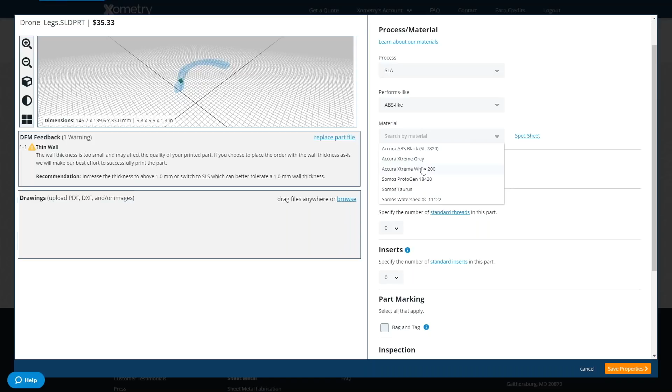In this case, I'm going to highlight SLA for obvious reasons, because that's what we're talking about today. We have a performs-like dropdown that can help you out if you're looking for something to simulate a material, because everything in SLA is an engineered simulant, so something that acts like polycarbonate or polypropylene or ABS. Let's go with ABS here. I could drop that down, and I could select materials that act like ABS. So let's do Xtreme White. And let's do this in high resolution. You'll see a few things happen.

Your price updates, as well as DFM feedback, will show on the site. So in this case, I have a very thin area right here that I may want to address. Let me go ahead, save properties, and show the next cool feature here, which is our replace file.

So this is brand new. This has been requested for probably like a year and a half now, so we're really excited to add this on board. Now when you get this DFM feedback, you can upload a revision right on the site, so you don't need to go into our parts library anymore to upload your replacement file.

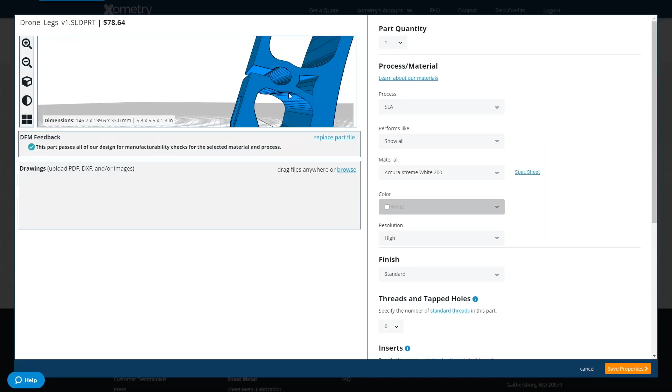And once this uploads, basically change your rev, you can do that directly on the site. This version I had here, I essentially took that DFM feedback, did a design modification on my part, and boom, everything is green and golden here. So my feature down at the bottom, I added more beef, cleaned it up, and now I should be fairly confident with my print that everything's going to turn out great with this feature.

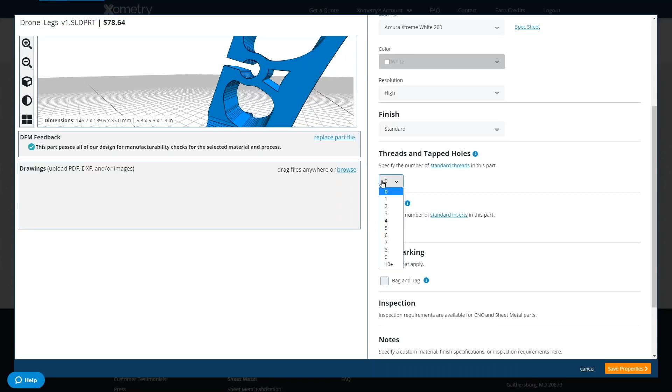With SLA in particular, we have a few finishing options. We have standard, matte, and custom available. SLA is kind of unique where we have a material called polygel, which is also a photopolymer process, but in this case I can actually do some stuff like threads, tapped holes, and inserts with this material. It's a little bit more robust. And even things like bag and tag, you can click through there.

As with all our orders, we are able to add certifications, so things like COCs, material certs. Even if you are working with something export controlled, you can click ITAR here, and that will change. That's extremely important to know up front as we're working this job through.

And once you're ready, you could upload multiple parts, configure them how you want. You could just go ahead, place order, and walk through your process.

So I could go back to the quote a little bit later if we have any questions in the Q&A session, but I really wanted to show that replace part feature because it's been so powerful once we added it. It's been widely used, and I wanted to show all these options we have available for getting quotes in different materials and different subsets, for example, of 3D printing.

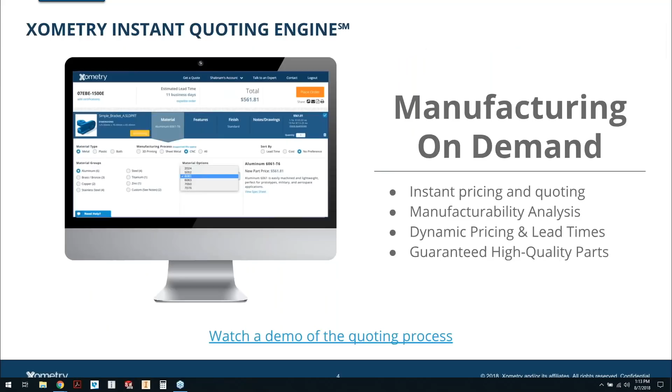So let's go back here. Let's get into the beef of this. Tommy, what is stereolithography 3D printing?

Yes, thanks Greg. Hey, this is Tommy. Hey, it's me, it's me.

Just a little bit of background. I think Shilpa had touched on it, where I've been in the 3D printing industry since, I guess, about 2004, and the first job I had out of college was actually working in an SLA shop in the finishing lab. So I felt all the pain of every part of the process, and this process is definitely very near and dear to me.

So as far as what is stereolithography, it's a technology where you're using an epoxy-based photopolymer. Basically all of the SLA materials are epoxy-based, and by photopolymer, that means the epoxy is activated or cured by the introduction of UV light.

So on the image on the right, you can see this laser scanning, and that's basically what's happening. If you're building a model of a person, our software is going to slice that person up into 1,000 layers vertically. With SLA, you have the option of 2,000ths or 4,000ths thick layers in most cases.

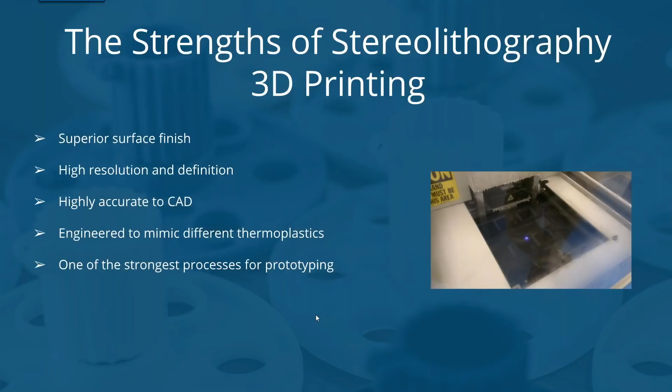We'll go into deeper detail on surface finish a bit later, but as far as prototyping for injection molding, this is hands down the technology I've used the most. A couple final comments on the SLA process in general: as mentioned before, all materials are epoxy based, formulated to mimic common thermoplastics in terms of relative stiffness, but not necessarily overall durability. All in all, I'd say this is one of the strongest processes for prototyping in general.

Just a quick recap on stereolithography: the strengths are it has smooth surface finish, high accuracy and detail, it does a good job of representing common thermoplastics, and overall it's an excellent balance of form, fit, and function.

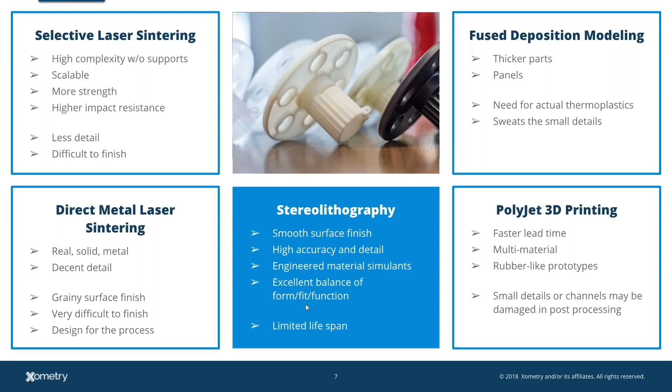I wanted to touch on direct metal laser sintering. It's very different as far as process and material, but in some ways it's similar to stereolithography, because you're building parts off a build base. In this case, you're building with a metal powder bed.

You're doing a similar thing, building small protrusions that support the part with a metal support structure. The difference is you're not using an X-Acto knife usually — when you're removing supports, you're using a bandsaw, pliers, and CNC machinery. So the finishing side of DMLS is very different, even though conceptually how the parts grow is similar — it has everything to do with the materials you're building with.

I may use SLS or SLA to do a test run of something I plan to build in direct metal laser sintering, because the cost is much less to prototype before committing to something like DMLS. Especially as I get to larger parts, like over the size of my fist, I may want to spend more time on the prototype to ensure it works before moving into a full metal part.

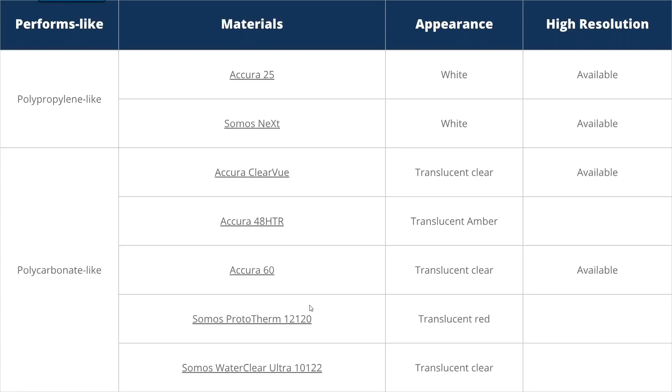I wanted to go over our material offerings. On our site, if you go to our FAQ, there's a link to learn more about our materials. There you can scroll down, read a small description of each material, and download the data sheet. The data sheet will also be available on our website — when you select that material on the quote dropdown, you'll be able to see that data sheet.

We've partnered with manufacturing partners all across the United States running real, professional stereolithography. One of the coolest things we've been able to do is offer both Accura and Somos material selection. Accura and Somos are actually competing brands, but Xometry isn't a single unit — we're kind of agnostic. All we want to do is focus on the applications that make your project a success. So you can click, drag, upload, and quote in these 15 materials, some of which have high resolution.

To help out a little bit, since people don't know the difference between Accura 25 and Accura 60, or Accura 48, like what do those numbers mean? I don't really know, but I can tell you that they're made to simulate things like polypropylene or polycarbonate.

We've actually created these major level categories for saying, hey, I have a polypropylene-like, or an ABS-like part, or a polycarbonate-like part, or even a rigid ceramic. This will help you down select from these 15 parts. As always, you could go even further with our data sheets, or even chat with us or talk with Tommy to help select through.

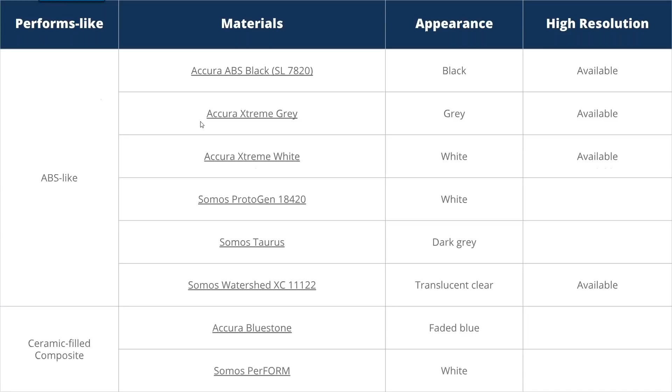But you'll see some themes going through here. From a general purpose standpoint, a lot of times our customers look at Somos Next or these Accura Xtreme materials as their catch-all material. I don't know quite what to choose, but I know these ones will work for my goal, because it has a very good balance of flex. So things like snap tabs, things like lip seals tend to work pretty well with this material, as well as a little bit of durability, because that flex gives it what I would consider impact resistance.

Another way to be durable is to be sturdy and strong. So things like Accura 60 is more kind of polycarbonate-like, and it's stiffer, but that means when it breaks, it doesn't bend, it snaps on you.

Tommy, you have more experience on this, but things like Bluestone and PerFORM are ceramic filled, and you don't even expect it to bend, right? Right, yeah, those are not going to bend at all, and yeah, they're ceramic filled materials. So I hesitate to even refer to them as plastics.

But yeah, they're very stiff, very rigid. They may chip a little bit, but overall, when you're thinking about these material selections, the polypropylene-like is going to be the most flexible. ABS-like is going to be the next up in terms of slightly more rigid. I think there's a lot of good options for general purpose materials in here.

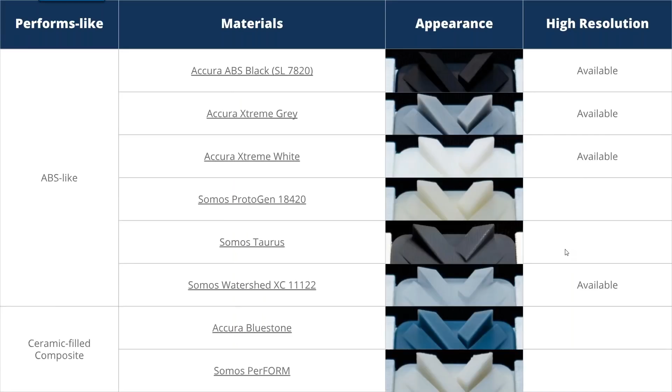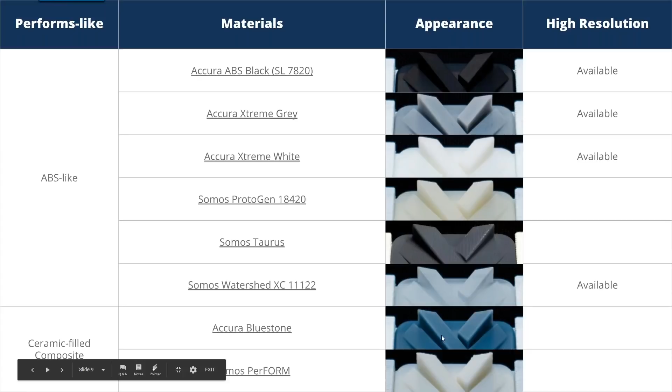That's actually a good point, Greg. There are a few of these materials in the polycarbonate and the ceramic filled options that can receive a thermal post cure to increase their temperature resistance, and that would be the Accura 48HTR, the Prototherm 12120, and then I believe it's going to be just the Bluestone and the PerFORM.

Temperature resistance wise, I believe after post thermal heat treat, it goes from about a heat deflection of 57 Celsius to somewhere around 110 Celsius. So again, compared to true thermoplastics, it's still actually fairly low in the game, but it's something that can bring a higher performance level.

At this point, that'll be more of a custom quote, but we hope to automate that within the quoting process.

I also wanted to spend some brief amount of time on what does SLA lead to. So we've compared it against other 3D printing processes and talked about how it goes hand in hand, and where to choose SLA. Usually, again, surface finish resolution is one of the biggest things that is talked about when you talk SLA.

But SLA also has played a very, very important role with this top row here. So when you do something like bridge tooling, and building urethane casts, one of the first things I do is I create something called a master pattern.

And that is something that is very accurate to CAD. I'm usually going to do some sort of hand finishing to it, so for example dry and wet sanding to get it to a smoother surface finish. I may even do things like clear coating to bring up more of a gloss look to it.

But with urethane casting, you're actually making a silicone tool around that master pattern, so whatever that pattern has on it is going to be what shows up. In fact, I've seen examples of someone accidentally putting a thumbprint on that clear coat, and all of a sudden every single part has a thumbprint in it.

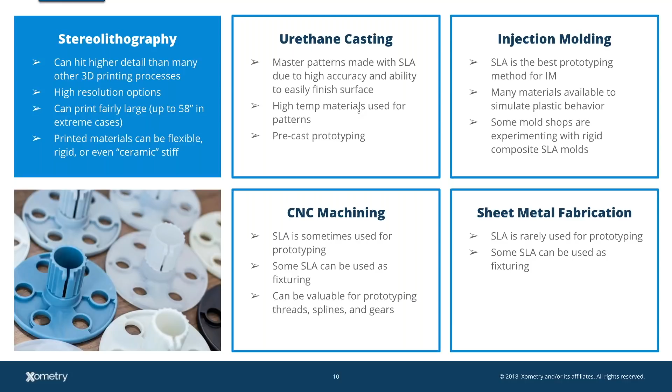And just by the nature that SLA acts like a plastic, it doesn't have the same rigidity for sheet metal, so I could probably count on one hand the times I've seen SLA used for sheet metal prototypes. I've seen other processes in our 3D world used, but with our site and our lead times, often it's almost as quick, maybe 2 business days further, to just get the real thing made. So I'd recommend when you're looking at different options for prototyping sheet metal, look at sheet metal as an option as well.

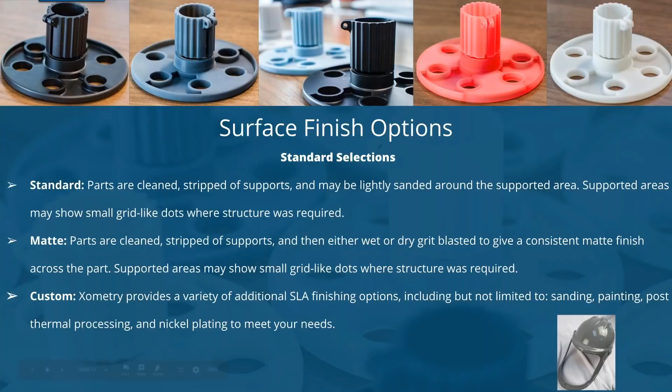And then finally we have our custom offering. There's just a ton of things that can be done to SLA parts, whether it's smoothing out with additional sanding on the non-supported or cosmetic surfaces, painting, thermal post cure, and then there's also options for nickel plating, which is pretty common, especially with the rigid composites.

So to wrap it all up, from a transparency standpoint, you can see some images down here of parts that were built in SLA and then received some significant post-finishing that basically took them to real transparency. As built, the transparent materials will still kind of have that marbled look, because the layer lines make it so you can see colors through the parts, but you can't necessarily read text.

But as soon as you say we need additional smoothing on these surfaces, then dollar signs follow very quickly, just because it's a very manual post-processing step where there's somebody in a finishing lab starting out with probably a 220 or 320 grit sandpaper, sanding up to about a 600 grit, removing all the scratches in between, and then adding some level of clear coat.

There's also a big difference in labor between wanting something that looks kind of like an icicle, where it's glossy but you still don't see a clear picture through it, maybe some distortion to it, versus something like this faceplate here, where it's been basically optically smoothed out. That's probably 4 or 5 more levels of sanding, wet sanding through, and then several coats to get this type of finish. So just understand that is labor.

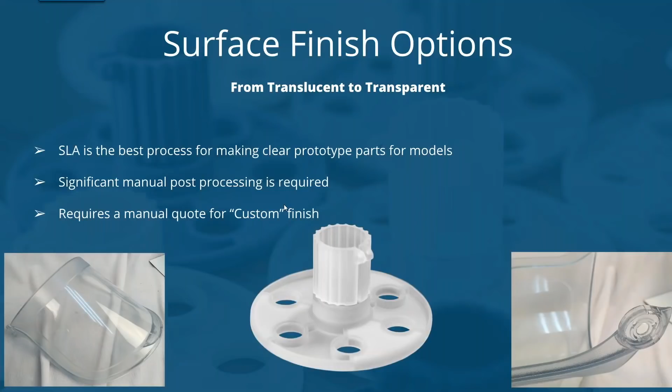It wouldn't surprise me if that was, say, a $200 or $300 part with a $400 finishing job on it. A lot of times when customers hear that, they don't want to pay that much. So to improve transparency on your own, you can get the part as a natural finish, and if you have some 400 or 600 grit sandpaper and a can of rattle can acrylic or lacquer from a hardware store, you can make significant improvements to the parts just by adding clear coat, without all the custom finishing.

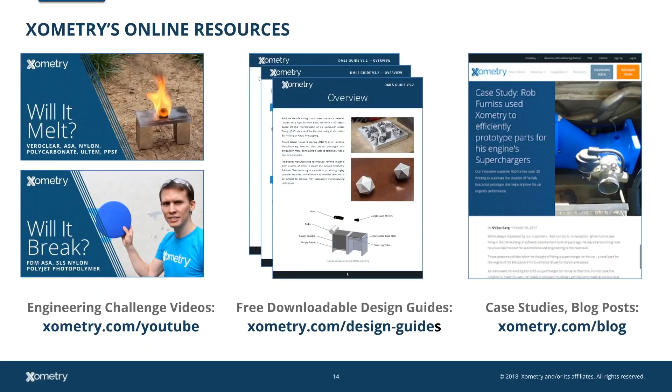And of course we have our YouTube series. We have instructional videos, but also this kind of edutainment series I've been doing covering things like heat resistance and impact resistance. I'm really excited to have 15 SLA materials now on this list, because that expands what we can do with our next set of videos. But remember, we do a lot of everything, and there's not one single process that's your answer. There are many different factors that go into what you're looking for, whether it's time, scope, cost, or something else. We're here to help guide your project, because all we want is a successful project—that's what makes you a customer who comes back for life.

We're always looking to add to our applications and to the different material selections we have, so please keep your feedback coming.

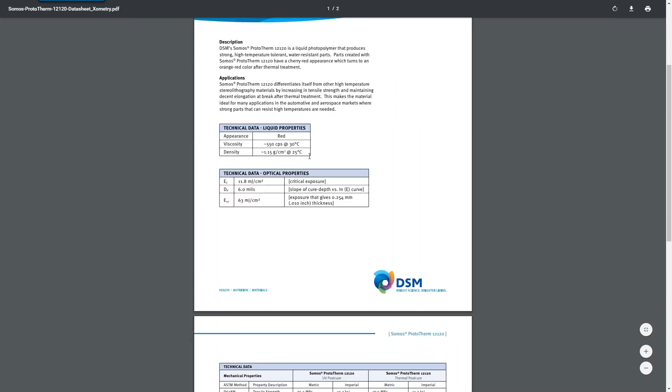I did see something about max temp, so I'll click on Somos Prototherm, which can have a post-thermal cure. There's a pre-cure, basically the UV cure as Tommy was describing, around 57 Celsius. But if you go through a thermal post-cure, you can get into the 110 to 126 Celsius range of heat deflection, which is basically the temperature where your part stops performing like it should.

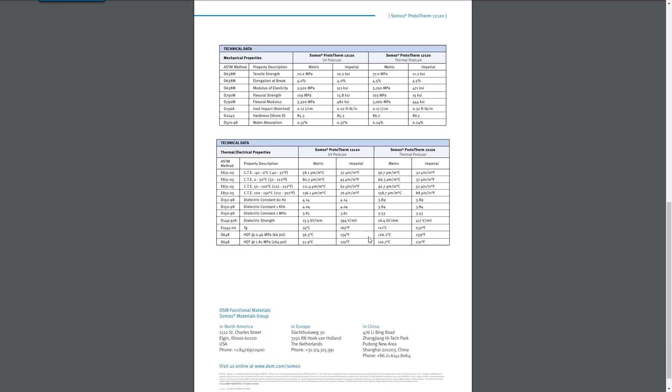So you can find that information—we have a spec sheet for every single material that we offer.

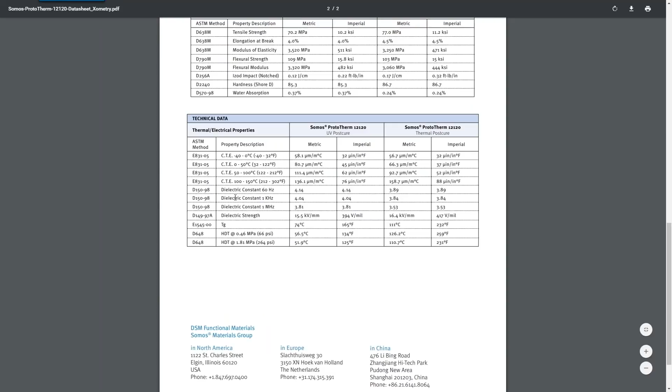I'd say try it out, even compare some costs. One of the beautiful things about our website is you can upload your 3D CAD file, select SLA, and see the lead time and price right away, and toggle between different materials and processes just as easily. I think one of the beautiful things about our site is that we offer all these manufacturing technologies in one place, one platform, to help you make a better, more informed choice for your next project. And honestly, SLA is just a great tool in the toolbox, and there's so many things you can do with it.